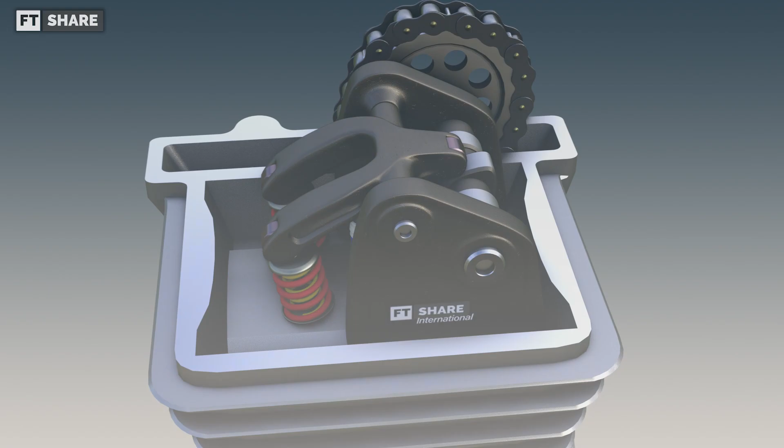Hello everyone, welcome back. If usually the valve system is only limited between SOHC and DOHC, well in this video we'll discuss a valve system that is still relatively rare, but very unique and has the potential to be applied en masse to future vehicles before the entire electric motor era enters. So this is the UNICAM valve system.

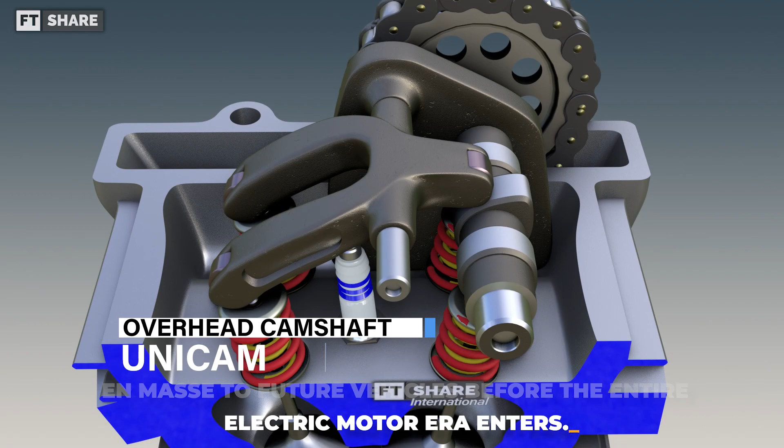UNICAM is a valve system construction that is very different from the others, SOHC and DOHC. And as the name implies, the UNICAM valve system is present as a united camshaft, or the union between DOHC and SOHC construction.

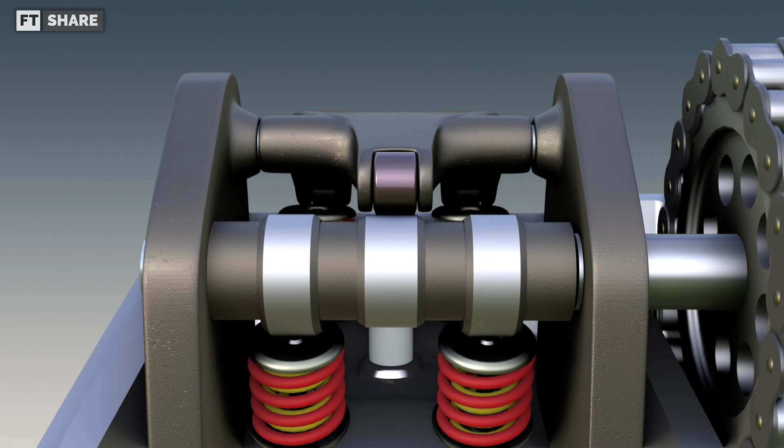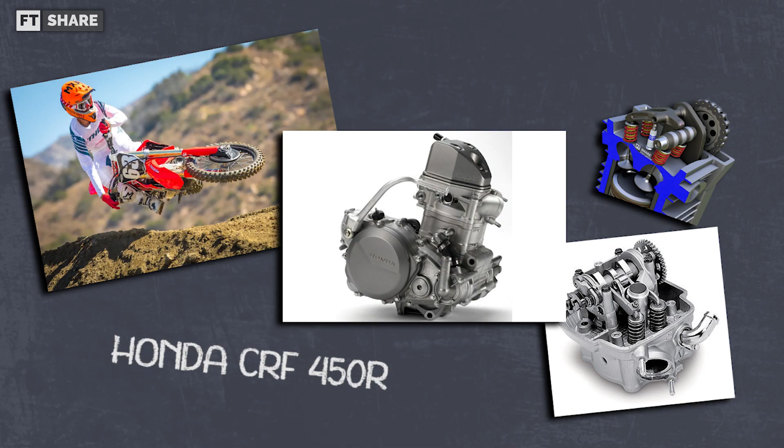The UNICAM system itself was developed by Honda to bridge the design between the SOHC and DOHC valve system construction. And the first mass production vehicle that used this valve system was the Honda CRF 450R first generation in 2002. With its simple engine design, the Honda CRF 450R is the lighter motocross in its class. And what are the construction details?

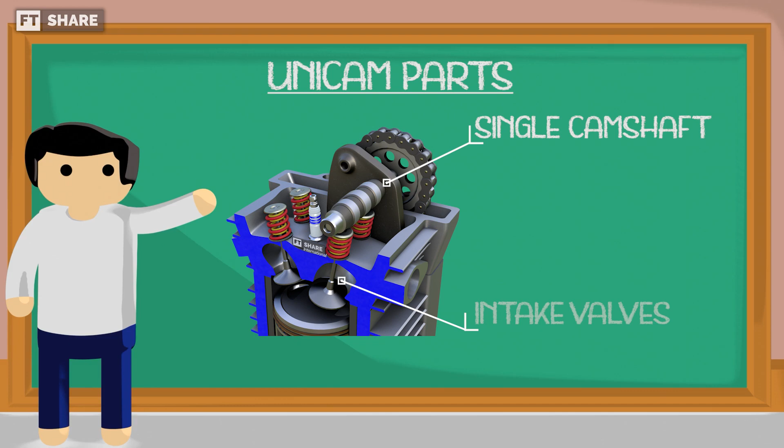Overall, the UNICAM valve system is still the same as other camshaft constructions. UNICAM system uses one camshaft, whose position is installed above the intake valve. Meanwhile, one rocker arm is also installed to move the exhaust valve.

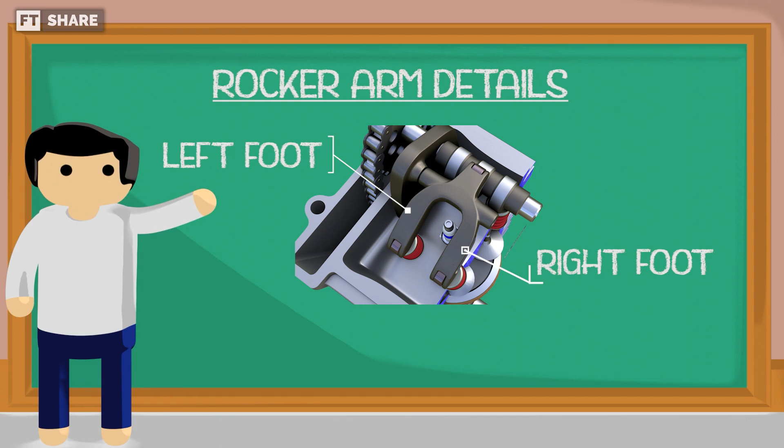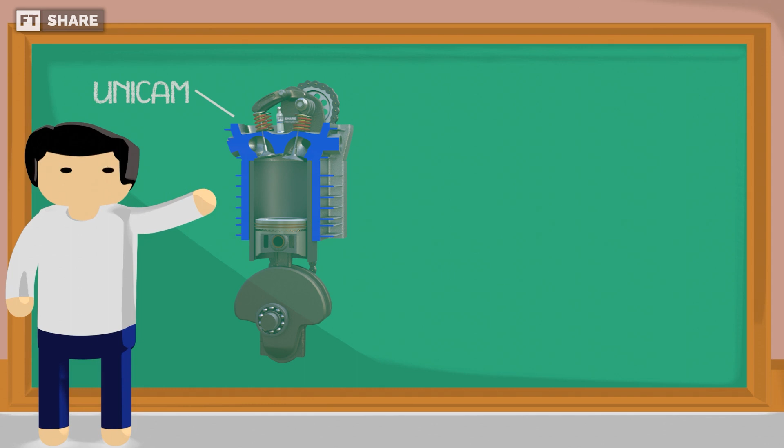And if we look in more detail, this rocker arm has two prongs to move the exhaust valve at once at the rear, and a roller on each side of it, which has the function of reducing the workload. Besides, with this system, Honda has succeeded in producing an engine that balances the advantages and disadvantages of SOHC and DOHC. Examples such as high RPM power, which is better than SOHC but not as high as DOHC.

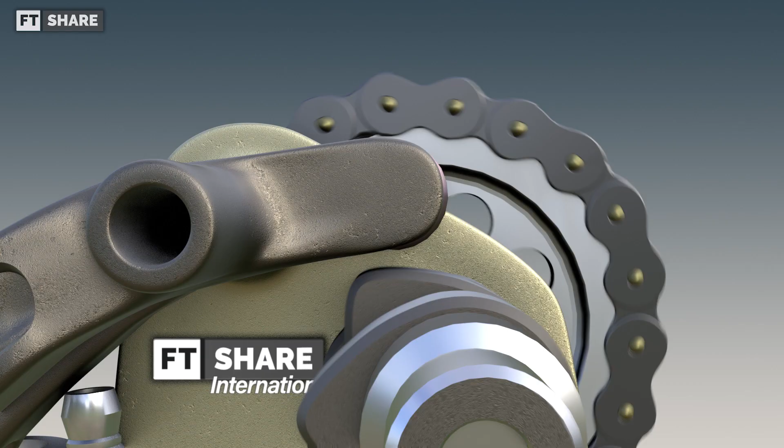Someone must be asking, why isn't it as good as DOHC? The answer is that the high RPM problem occurs due to the remaining inertia of the rocker arm, which reduces the response of the valve to close the combustion chamber. And of course, causes the fuel air intake to be pushed into the exhaust port when the piston moves to the TDC, or top dead center, making it unsuitable for installation on high-performance vehicles that have an engine speed range of more than 10,000 RPM.

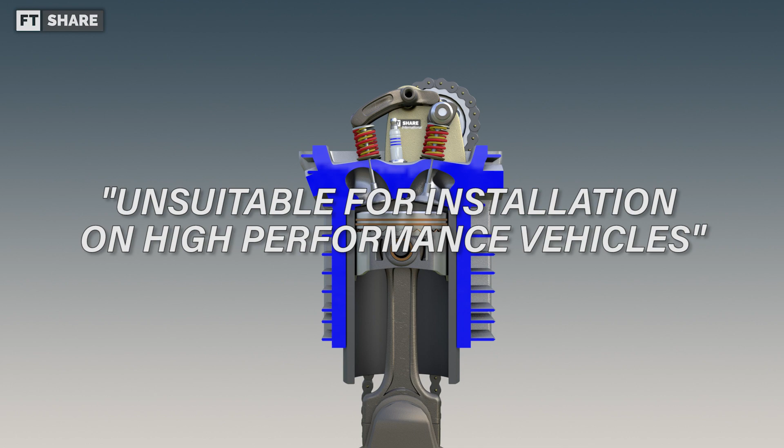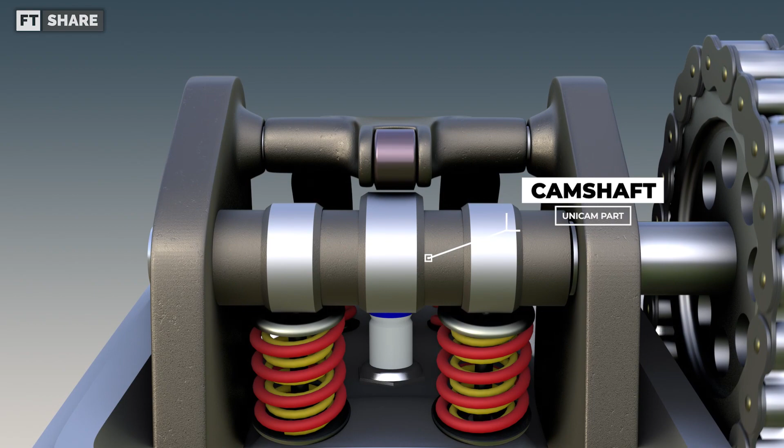Let's continue to the second advantage, where the torque is good at lower RPM compared to the DOHC, but not as high as SOHC. This can happen because using one camshaft will undoubtedly reduce the load at low RPM, although it is not as good as a SOHC engine with one intake valve and one exhaust valve.

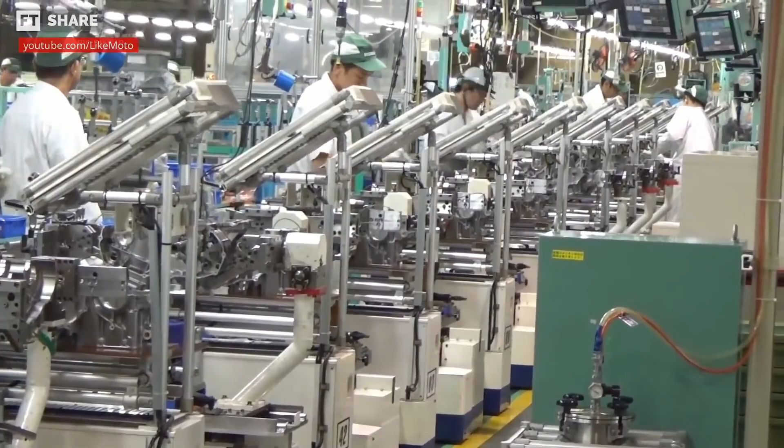Okay, now let's go to the production cost section, one of the most crucial parts in determining the existence of technology. In terms of production, this engine can be made at a lower cost than a DOHC engine because it only uses one camshaft, even more straightforward than a SOHC engine.

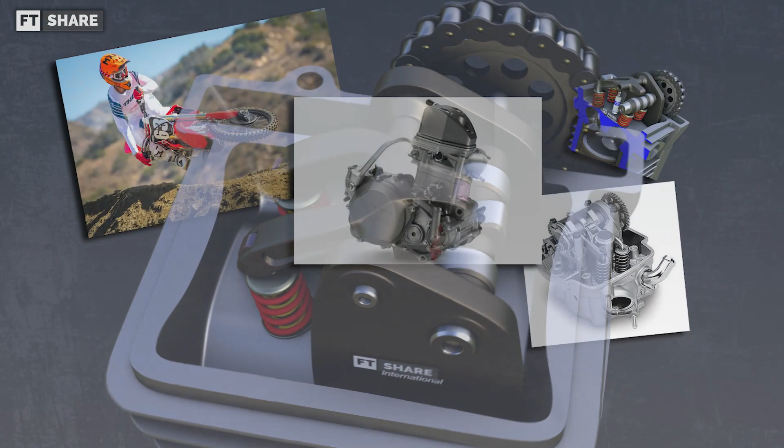This is because it doesn't use a rocker arm on the intake valve. In addition, with a shorter cylinder head design, the camshaft will be placed lower, like DOHC, because it is placed just above the intake valve, which of course makes the engine with the UNICAM valve system more compact. However, because its performance is between SOHC and DOHC, this valve system is not considered too important to present.

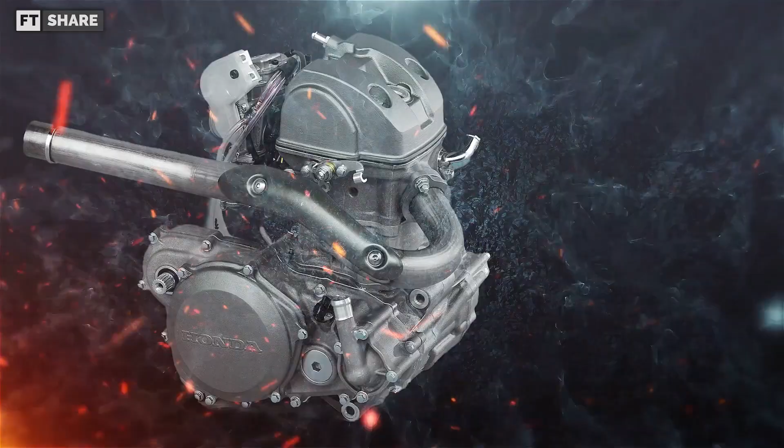And it's still a technology that must be regarded as further developed to be installed in mass vehicles, especially for high-performance vehicles such as the CBR or CB lineup, which incidentally work with a very high RPM range. Its application is still very limited to only a few products, like the Africa Twin 1100, Honda CRF 450R, and also Honda CRF 250R.

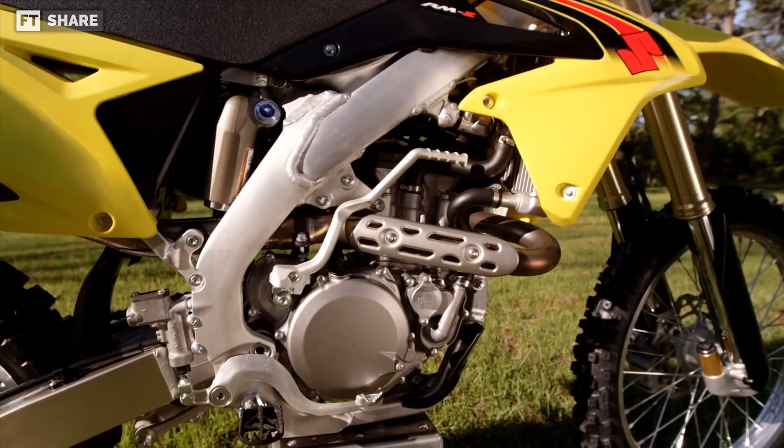But even so, there is good news too, where Suzuki has also started developing this technology for their trail bikes, and we can wait to see it.

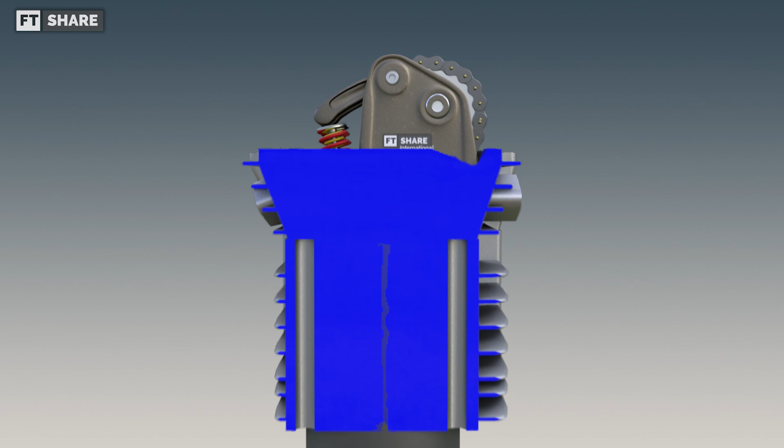Further, with better performance than a SOHC engine, simple construction and lower production costs, it is possible that in the future there will be more motorbikes released with this one valve system, and maybe we can easily find it and enjoy it on the roads. Okay, I think this is enough information we can tell in this video.